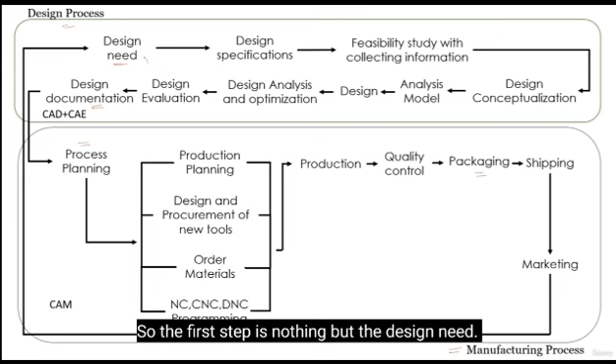Now coming to the design phase. In this design phase we have multiple steps. The first step is design needs. The second step is design specification, and the third step is feasibility study.

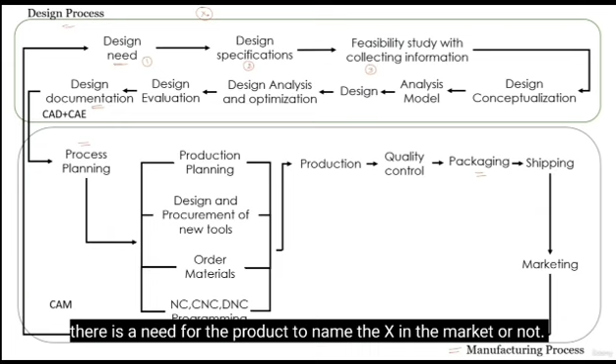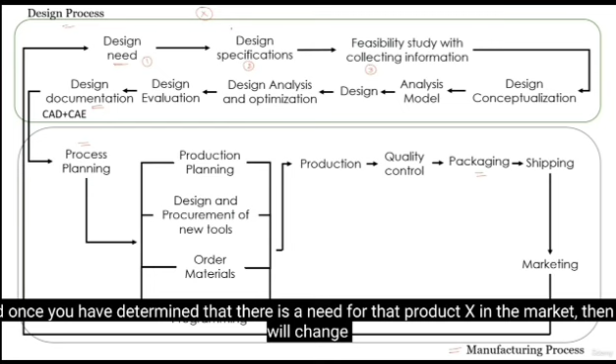So now what is design need? Let us say you want to design a product named X. You need to go into the market and study whether there is a need for a product named X in the market or not. Once you have determined that there is a need for that product X in the market, then you move to the second stage, where you are going to define the specification of this design or product X.

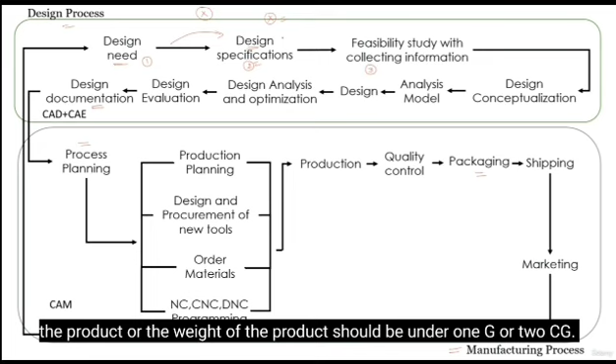For example, the specification could include the dimension of the product, or the weight of the product should be under 1 kg or 2 kg. Likewise, what is the functionality of the product? You define all these things in the design specification stage, and once you've completed it, the next stage is called feasibility study, or the collection of information stage.

So what is feasibility study? There are a number of types of feasibility studies, like economic feasibility, manufacturing feasibility, design feasibility, and many others. We will take the example of economic feasibility.

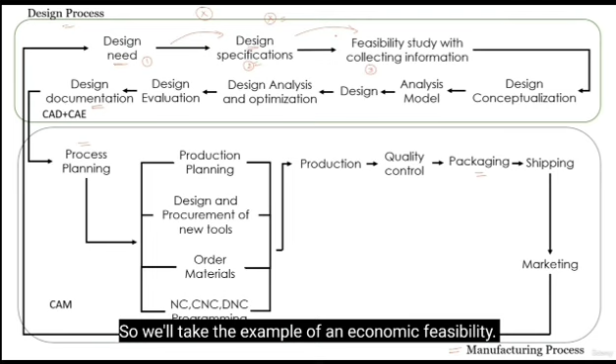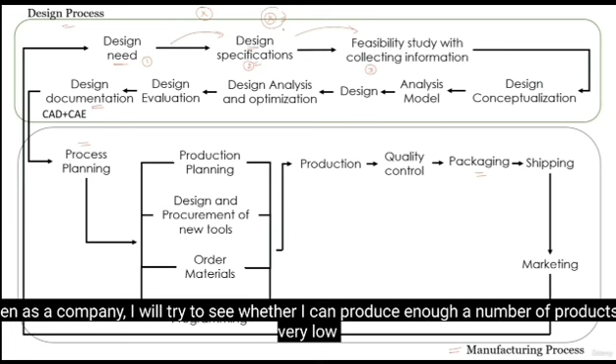What is economic feasibility? Let us suppose I am going to design this product named X, produce it, and then sell it to the customer. As a company, I will try to see whether I can produce enough of the product at a very low cost and sell it at a nice profit to a large number of consumers, so that whatever time and cost I have incurred while designing and manufacturing the product are recovered or not. This is one example of a feasibility study related to economics.

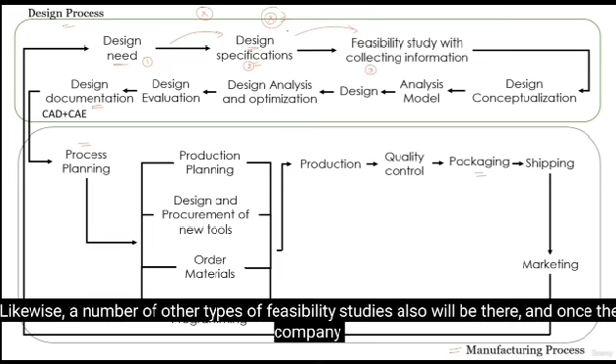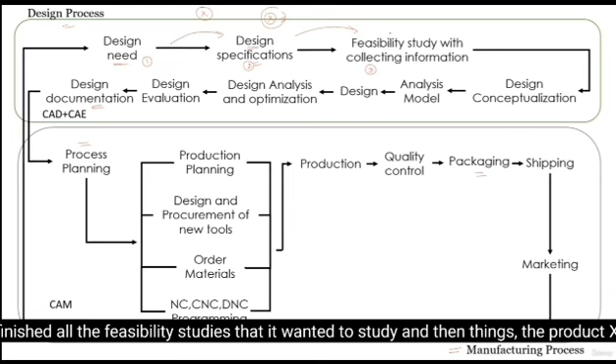Likewise, a number of other types of feasibility studies will also be there, and once the company has finished all the feasibility studies it wanted to study, and thinks the product X can be feasibly prepared or manufactured, then they will go to the design conceptualization phase.

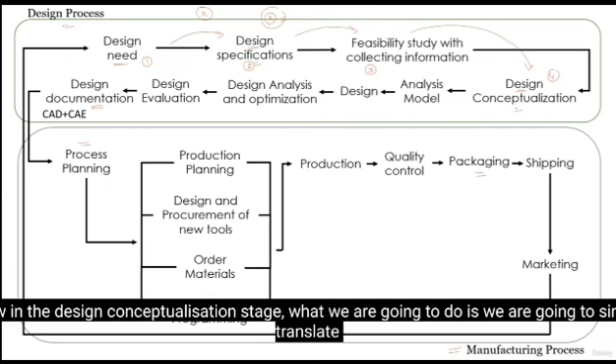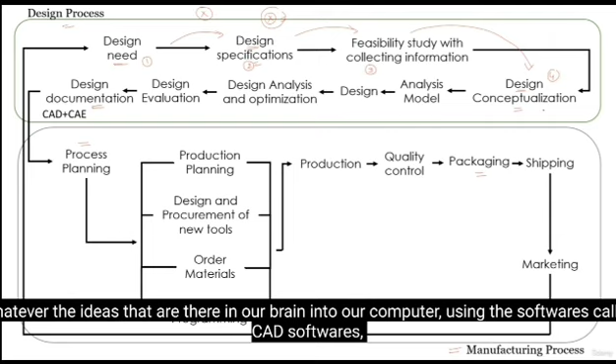Let us say this is the fourth stage in the design phase of the industrial product cycle. Now in the design conceptualization stage, what we are going to do is simply translate whatever ideas are there in our brain into a computer using software called CAD software, which stands for computer aided design software.

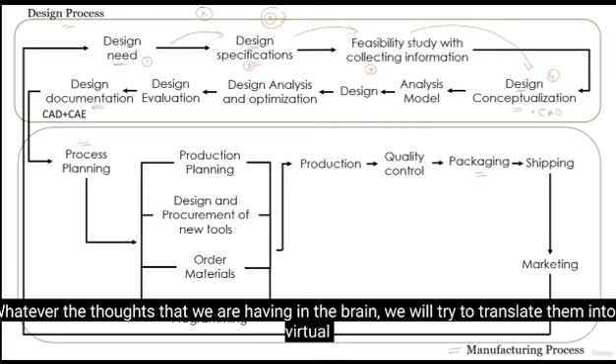So what will happen here? Whatever thought we are having in the brain, we will try to translate into a virtual product inside the computer, so that we can feel how the form and shape of the product or design might be.

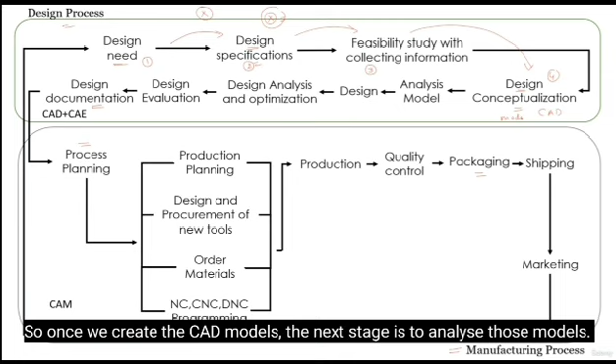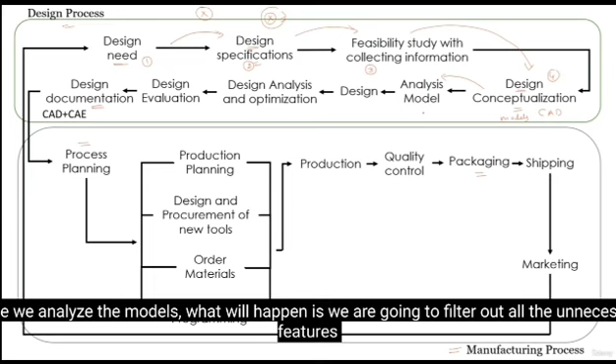Once we create the CAD model, the next step is to analyze those models. Once we analyze the models, we are going to filter out all the unnecessary features, or filter out all the unwanted parts.

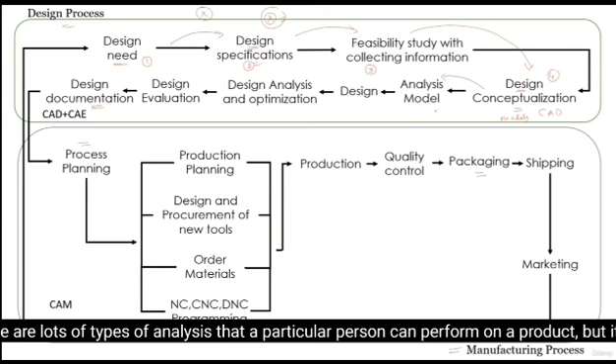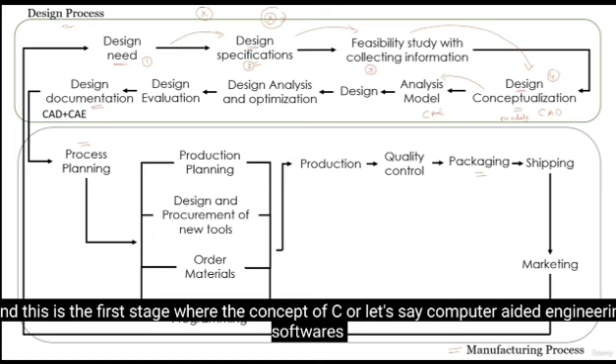Analysis of the model may be static analysis, contact analysis, assembly analysis, or interface analysis. There are a lot of types of analysis a particular person can perform on the product, but it will be based on the functionality of the product. This is the first stage where the concept of CAE, or computer aided engineering software, comes into the role in the design process. So this is where CAE software is used.

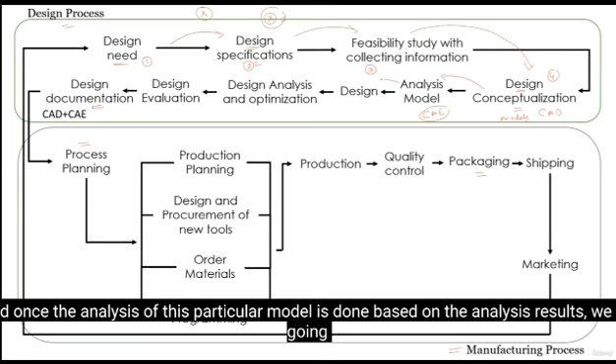Once the analysis of this particular model is done, based on the analysis results, we are going to finalize the entire design, and here also we will be using CAD software.

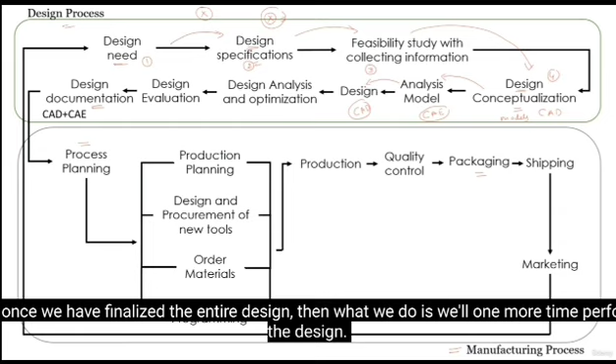Once we have finalized the entire design, we will perform the design and analysis one more time, and then we will try to optimize that design. Optimizing design means keeping all the constraints constant, and we will try to improve the design through the process of optimization. Once we are done with the optimization phase, we go to the design evaluation phase.

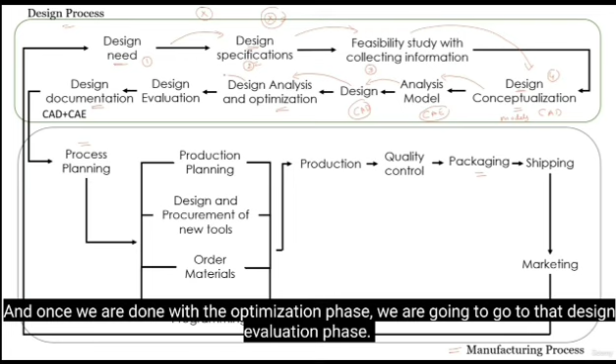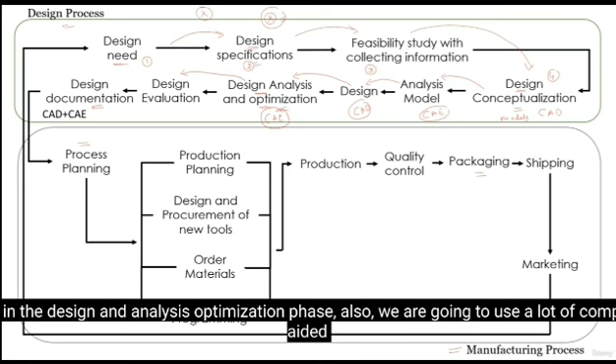In the design and analysis optimization phase also, we are going to use a lot of computer aided engineering software, that are CAE software. Once this is done, the next stage of design evaluation is to prepare a physical prototype and then perform experimentation, and see whether the product is going to work according to our requirements or not.

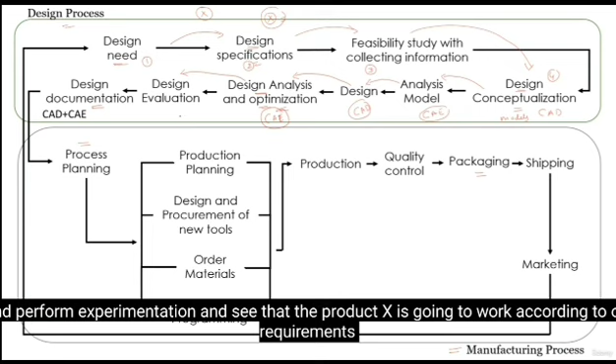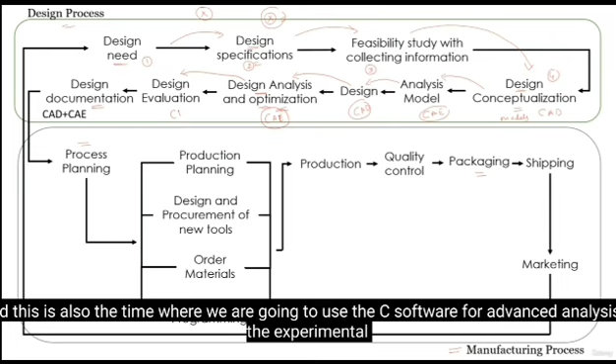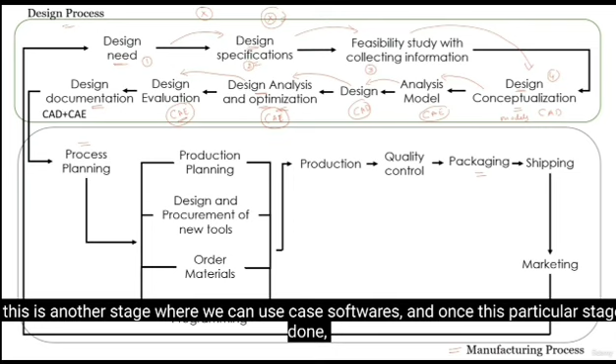And if it is going to work, then we are going to finalize that design. This is also the time where we are going to use CAE software for advanced analysis of the experimental results as well. Once this particular stage is done, then we are going to go to the design documentation stage, where extensive use of CAD will be done.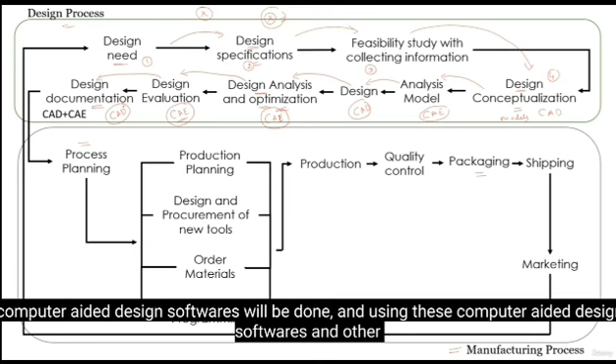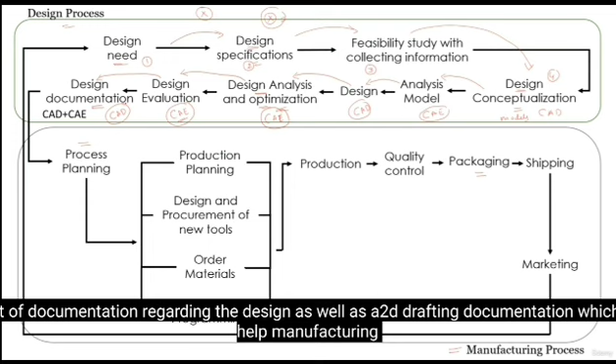Computer aided design will be done, and using this computer aided design software and other software, a lot of documentation regarding the design, as well as 2D drafting documentation which will help the manufacturing person to produce the part physically, will be produced in this particular stage.

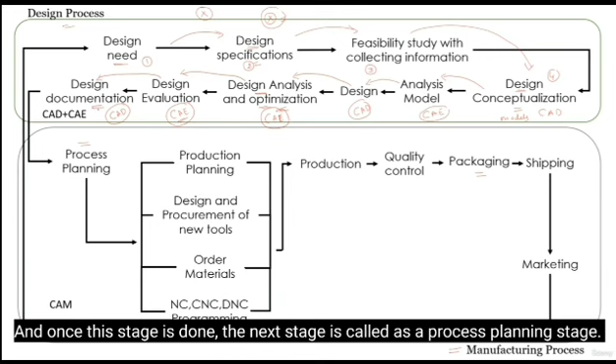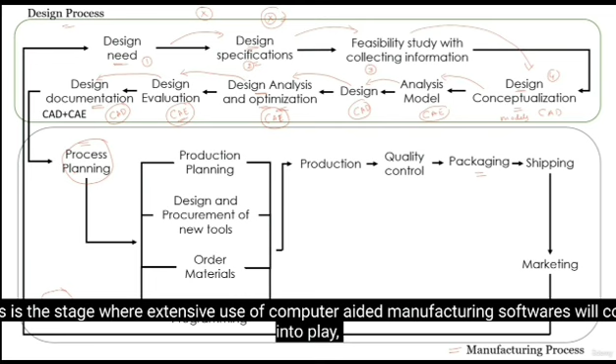Once this stage is done, the next stage is called the process planning stage. This is the stage where extensive use of computer aided manufacturing software will come into play. This process planning stage will include different steps like production planning, how to produce a part, to what level a part should be produced, etc., and the design and procurement of new tools.

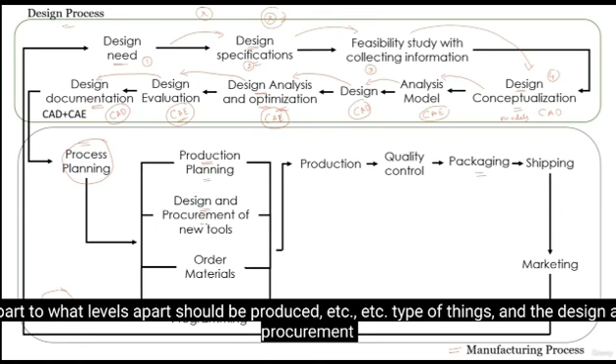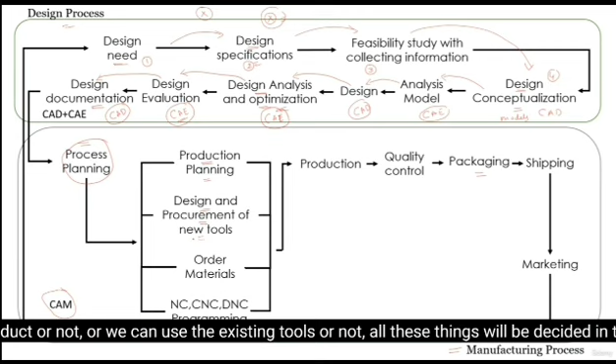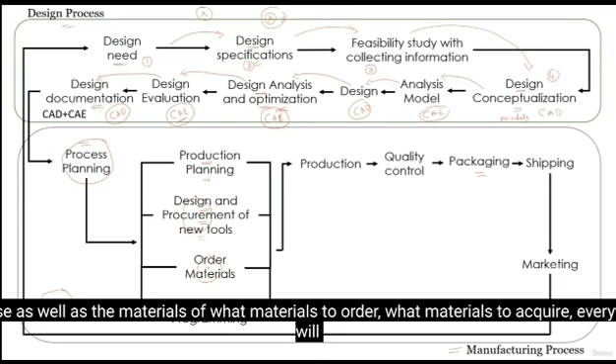So if there is any requirement for a specific type of tool to be developed for producing the product, or whether we can use an existing tool, all these things will be decided in this phase, as well as what material to order and what material to acquire, everything will be decided. And then CNC programming and CAM programming, all this type of thing will be done in the process planning stage.

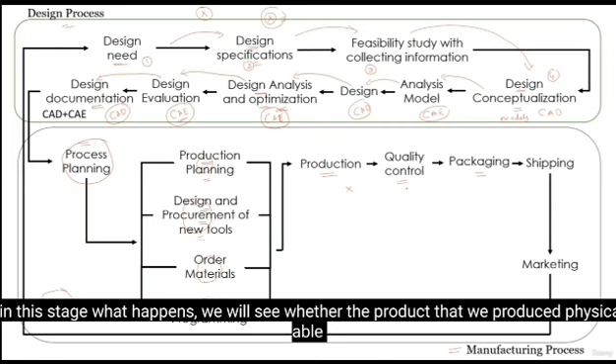Once this particular process planning stage is completed, then the next thing is the direct production. Once this production is done, it will go through quality control. So whatever product we produce in the production will go through quality control, and in this stage we will see whether the product we produce physically is able to meet our quality standard or not.

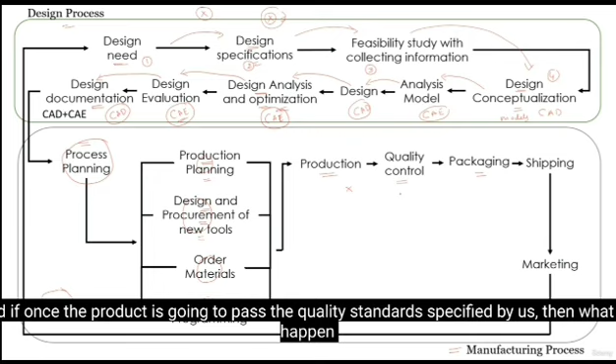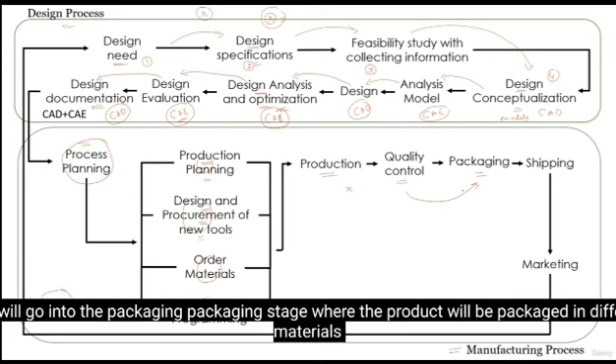And once the product passes the quality standard specified by us, then it will go into the packaging stage, where the product will be packaged in different materials and different means, and then shipped to the customer. Once they ship to a consumer, the marketing people will take action and try to market and sell as many products as possible.

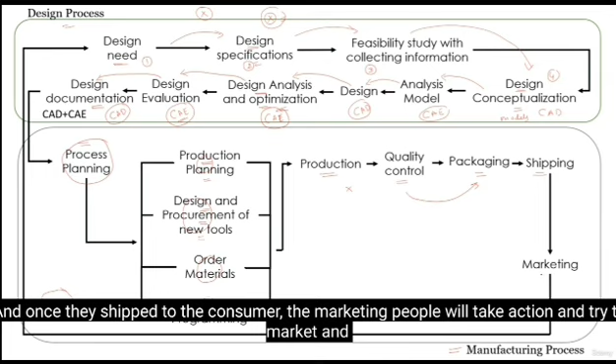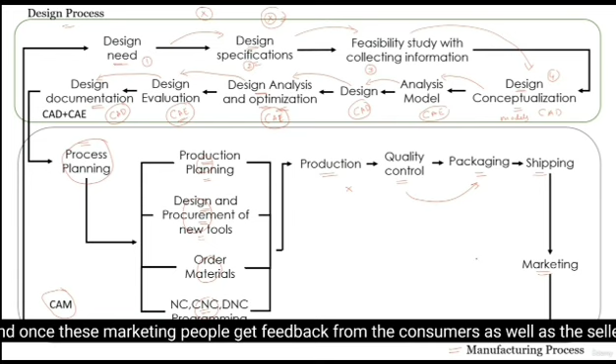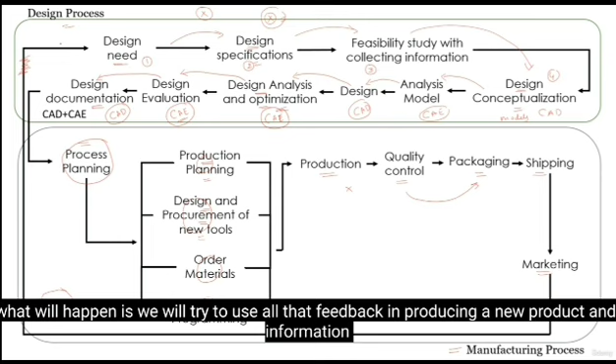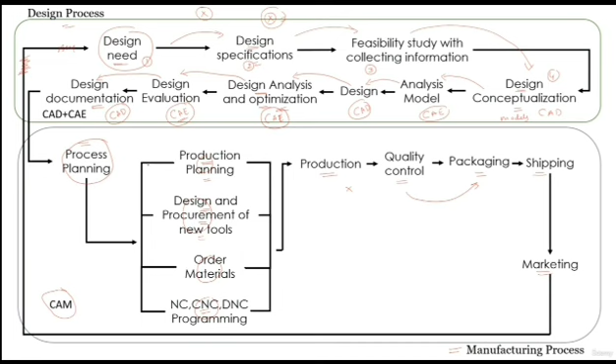And once the marketing people get feedback from the consumer as well as the seller, we will try to use all that feedback in producing a new product, and this information will be fed again into the design need or design identification phase for a new product or improvement of the existing product. So this is what a basic industrial product cycle looks like.

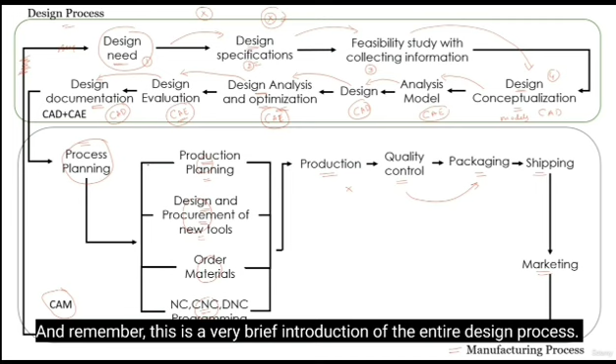Remember, this is a very brief introduction of the entire design process. Sometimes for a few products it may include some extra steps, or repetition of steps, or may also have more depth. But this is an overview of the industrial product cycle. Thank you.